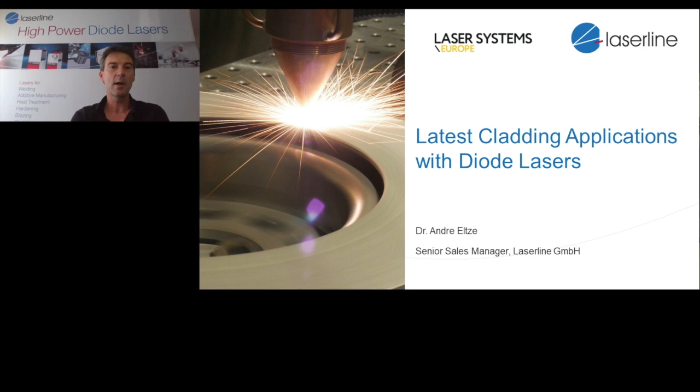Use the appropriate tool for each application individually. I'll be looking at a quick introduction to the company Laserline for those that don't know, the main products and applications that we see in general for our lasers.

We'll be looking at the process of cladding, the main and established cladding applications, and then go into detail of the EHLA process, extreme high-speed laser cladding process, that we use as basis. It's also an introduction into the cladding of brake discs, maybe the main focus of my talk in the following - a very nice, very interesting, and very promising application for diode laser cladding.

We'll then look into some of the further trends in cladding, as mentioned here, before going into the summary of my talk.

So let's quickly look at the company. The company is 23 years old now. It's privately owned and managed. There's something like around 300 people in the headquarters in Mülheim-Kärlich, just outside Koblenz. We are halfway between Frankfurt and Cologne, easy to access by plane to Frankfurt or Bonn-Cologne.

The company is present globally. We have subsidiaries and distributors all over the world, so we are able to serve our customers everywhere in the world.

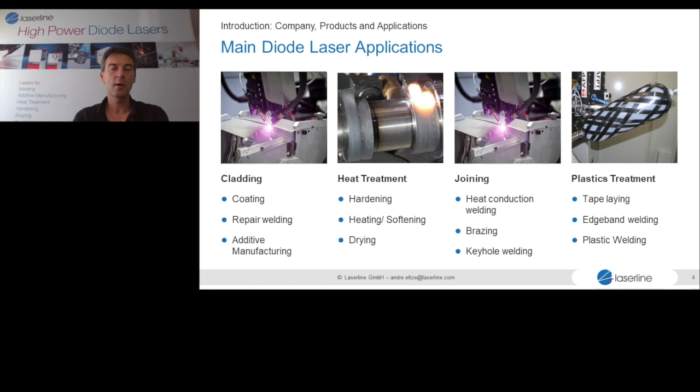There's a range of other applications related to plastics treatment, for example tape placement of carbon fiber reinforced tapes, as you can see in the picture on the very right side. This is carbon fiber reinforced plastics that is molten using the laser and used to build - this is the start of a container for hydrogen, for hydrogen cars, for example, as you can see in the picture here.

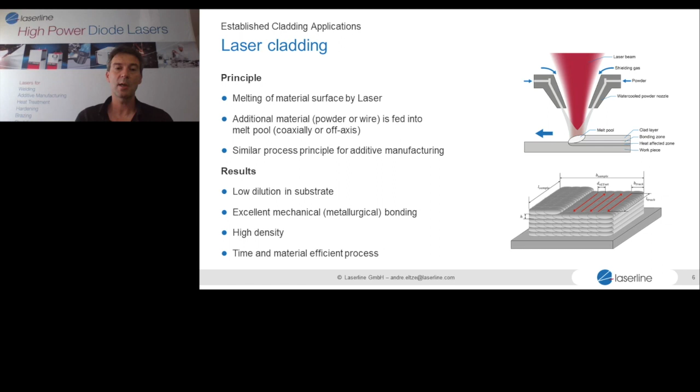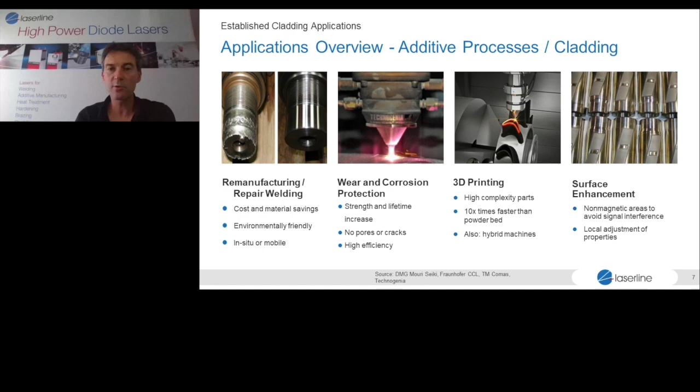Also in hybrid machines. And there's some special applications where you want special features in the surface. For example, when you try to get some signal information through a tube, then you want to have special materials in the surface that avoid interference for a sort of measurement.

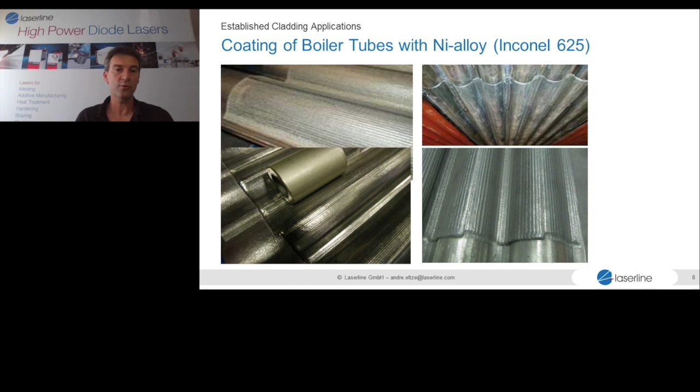And so this is tungsten carbide clad into the surface for wear protection. Tungsten carbide in typically nickel bases or nickel alloy bases.

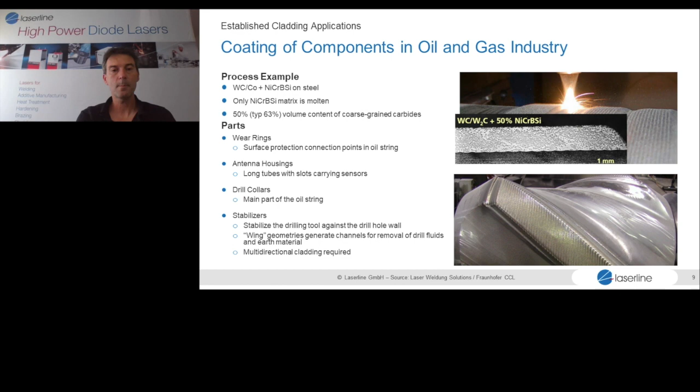In many cases, the repaired part is better than the original part because you can use more suitable, maybe more wear-resistant powders in the process.

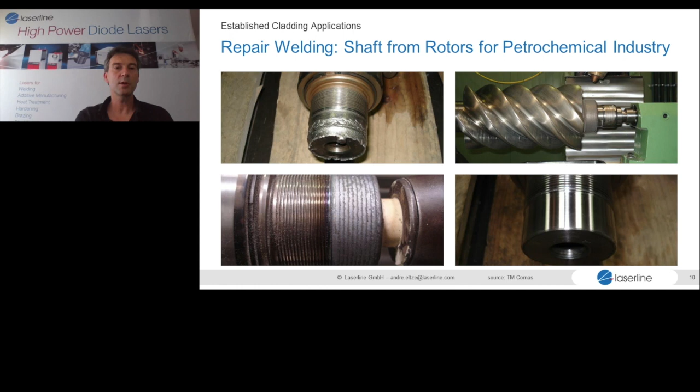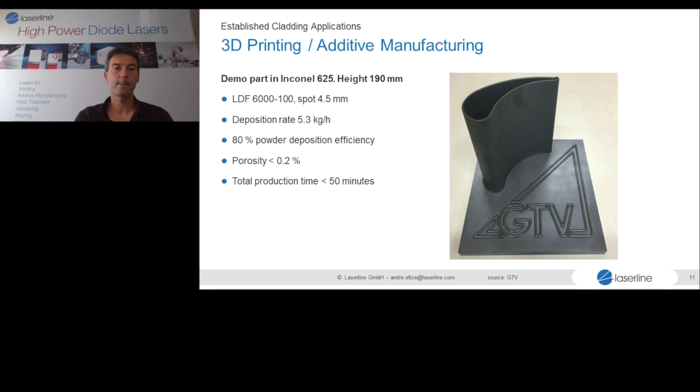Let's look at the high-speed cladding processes like EHLA and others in the following that I will then need for the brake disc application. The principle was invented and patented also by Fraunhofer ILT in Aachen. A lot of the process development was done with Laserline lasers, and the main principle, as opposed to conventional laser material deposition, LMD, or laser metal deposition, is that a lot of the laser power goes into base material, and the powder blown into the molten layer is then molten together with the material, as opposed to the EHLA process, more with using special nozzles, adapted nozzles and a slightly different offset, also much smaller laser power.

You would deposit more of the energy into the powder itself and less into the substrate. As a result, you get thinner layers, you get less dilution of the base material, so you can work with thin and very precise layers.

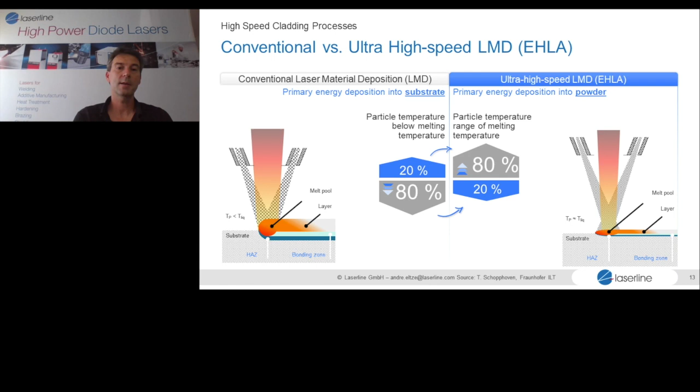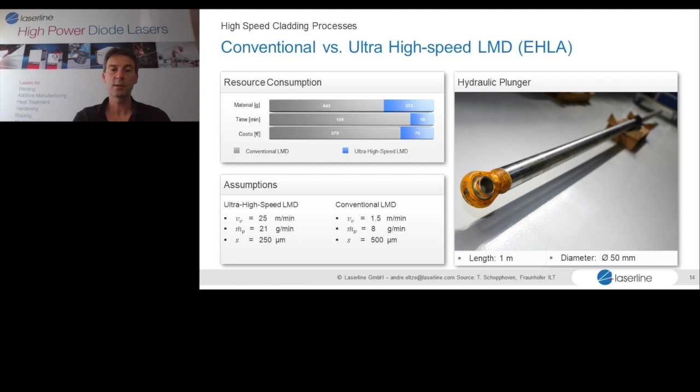Looking at some of the results, so I mentioned very high surface rate, quite high feed rate, that's why you need symmetric components. Typically, as with all laser cladding processes, you will get a fully metallurgical bond, and you can have very thin layers. And because the dilution is so low, you can use thin layers where you have the full quality of the added powder.

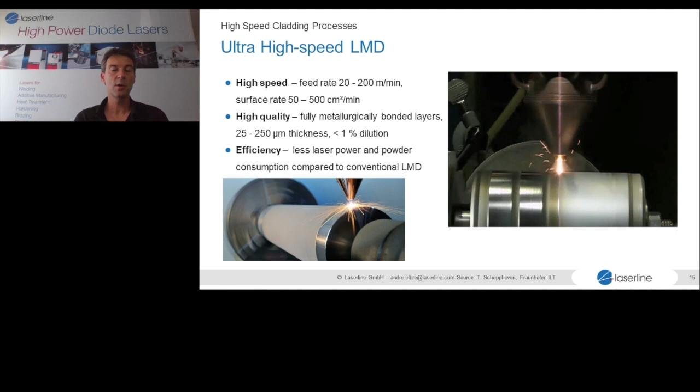The process in the end becomes very efficient, simply because you can work with lower power, you can work with less powder because you have thin layers, so it's environmentally and also cost-wise very efficient process. And this is the process that we use for the cladding of brake discs.

Why would we want to clad brake discs? Quick introduction into the subject. The European Union is currently planning, as other countries as well, maybe this comes in 2024, to ban conventional brake discs that are simply built from cast iron, typically gray cast iron, that produce a lot of fine dust, particulate matter. In fact, according to some of the figures, more than 20% of the fine dust, depending on which fraction of particle size you look at, comes from the brakes only. Still, the most important part comes from the exhaust, but this portion also needs to be reduced.

One way of reducing fine dust produced from brake discs that are not clad or treated in some way is what we are trying to address. There's already a solution that exists—to my knowledge, it's used for the Porsche Panamera only. That's the iDisc from Bosch and Buderus.

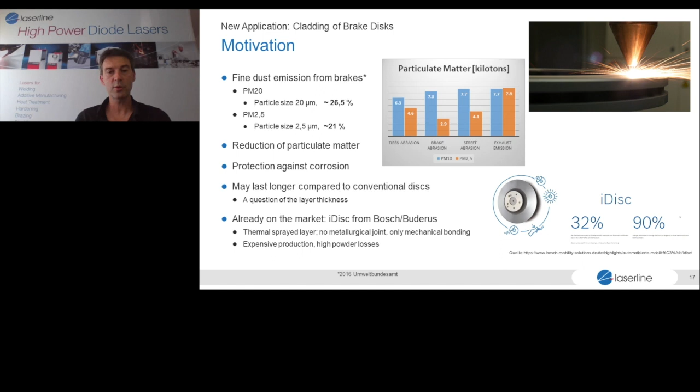It's a thermal spray layer, and as mentioned before, this is simple mechanical bonding, which also requires quite a lot of powder. So it's a less efficient process than what we are trying to achieve with the laser process.

Why do you need the buffer layer? The reason is that the carbide layer has a tendency to crack, and then you would get a corrosion problem through the cracks of the carbide layer.

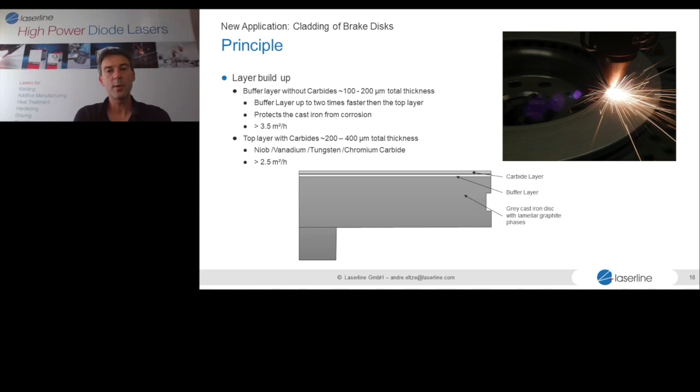This is why you need several layers, and we've done this development together with a car manufacturer and a manufacturer of brake discs. The aim of this project is for standard brake discs for passenger cars in the diameter 300, 350 millimeter.

The idea is to get 100,000 of such brake discs per year per machine. Some simple calculations show that, because we have to clad the brake disc from both sides with at least two layers each side, we have something like 2 to 3 minutes cladding time for each side, since afterward the brake disc is also machined and ground to remove the rough surface and get a nice shiny surface.

So the development we did was aiming at 2 to 3 minutes per side, which requires quite a lot of laser power. The development we did in our Laserline lab in Koblenz was based on laser power between 8 and 22 kilowatt.

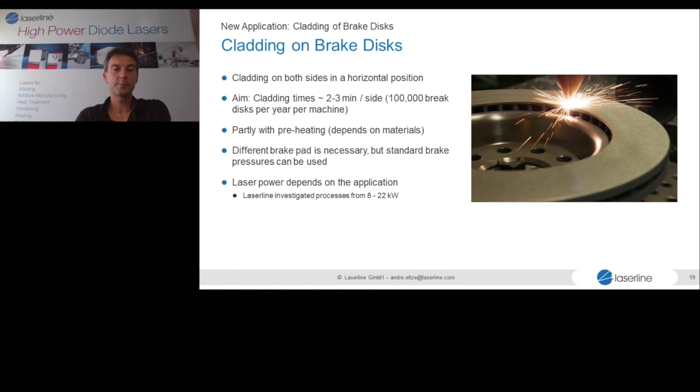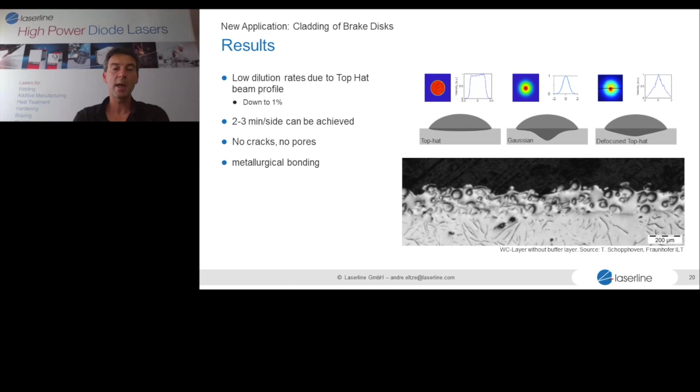What's important is there are no cracks, no pores, and we get a very nice metallurgical bonding. So in the end, Laserline is able to show a complete brake disc cladding solution. We've shown the process, and we're able to produce 100,000 parts per year on one machine with lasers.

All of these solutions were developed with Laserline diode lasers. We can now reach up to 45 kilowatt. The processes we did for this case were typically between 8 kilowatt and just above 22 kilowatt output power.

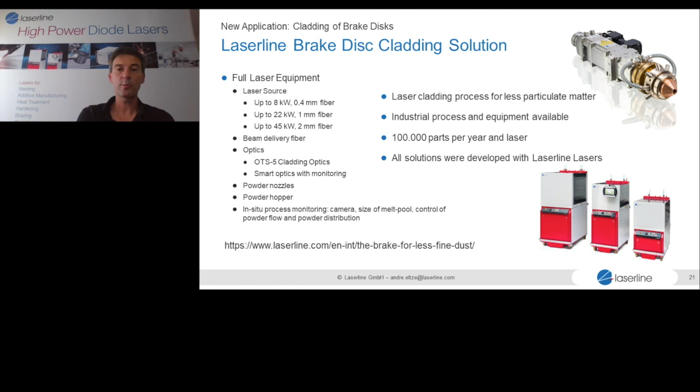Let's look quickly at the last slide on further trends. That was on the brake disc applications. We see more and more applications looking at wire-based cladding—we're able, at much higher efficiency, to add wire into the surface of a material, in particular for 3D printing as an example.

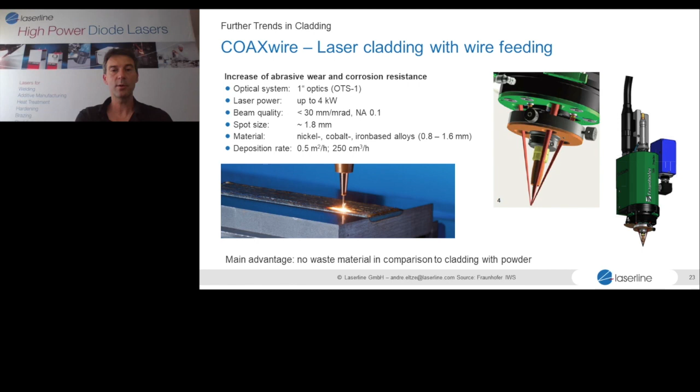We see the trend, as already shown in the brake disc application, moving more and more towards very high power. We've been able to show extremely high deposition rates—in this case, 35 kilogram per hour deposition of cladding powder using 50 kilowatt output power.

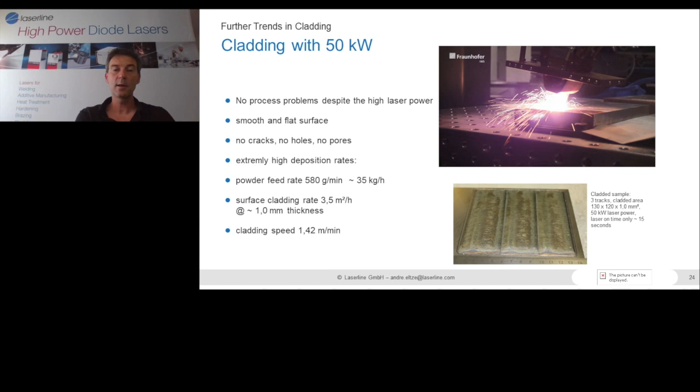So we see the trend in this direction. What's also interesting is a new laser based on blue diodes. In this case, it's a hybrid process combining infrared and blue diode laser for cladding of copper powder onto a copper substrate—something that would not work with another wavelength simply because of the problem of absorption.

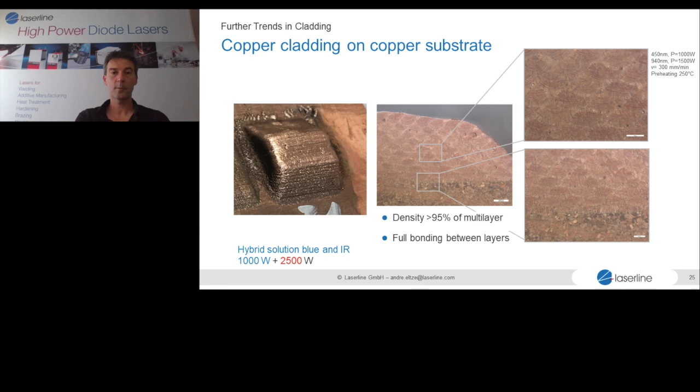Quick summary: I've introduced the company. We see ourselves as the market technology leader for high power diode lasers. We provide lasers, beam delivery, and processing optics. We have extensive application know-how and can support customers in the application.

I've shown some established cladding applications, in particular for wear and corrosion protection, but also for 3D printing. We've looked at high-speed cladding of very thin layers with low dilution, and the cladding of brake discs aimed at reducing fine particles, in the range of 8 to 22 kilowatt power. We've also had a quick look at further interesting applications: wire-based cladding, very high power cladding, and cladding with blue diode lasers.